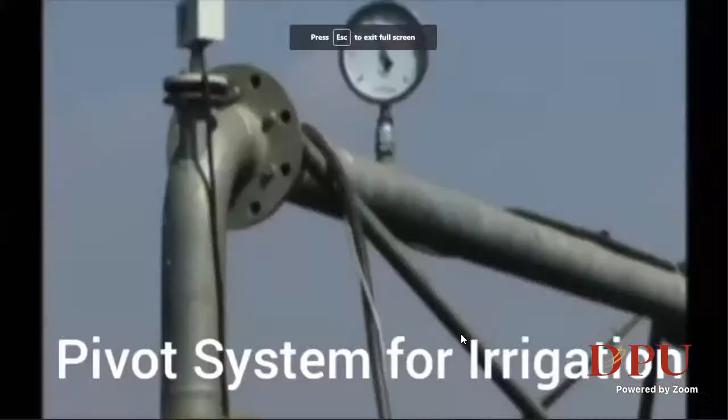Projects in the field of structural engineering, water resources, environmental engineering, concrete technology, transportation engineering.

Projects are industry sponsored, based on societal needs, and technical solution to real life problems.

Students enthusiastically exhibit their project in front of experts. Such platform boosts their confidence.

Strength of department is strong industry institute interaction, Center of Excellence by Dr. Fixit in the department.

Also, department has introduced new elective retrofitting and rehabilitation of concrete structures at SPPU.

Benefits of industry institute interaction to the students are sessions by industry expert, training programs, workshops, seminars.

Civil engineering cannot be learned in four walls of classroom. Hence, the department provides internship program to students and ensures that every student does it effectively.

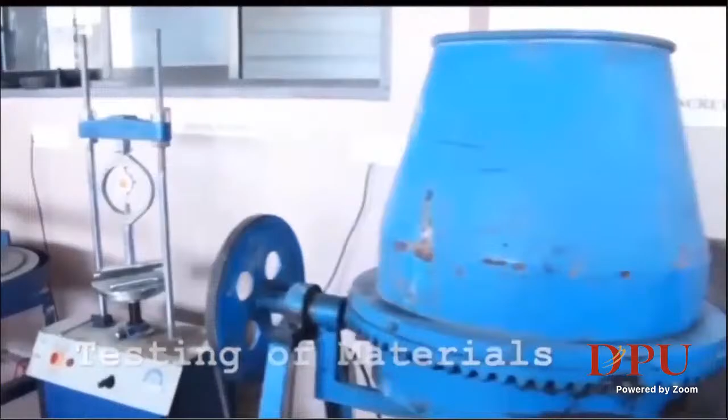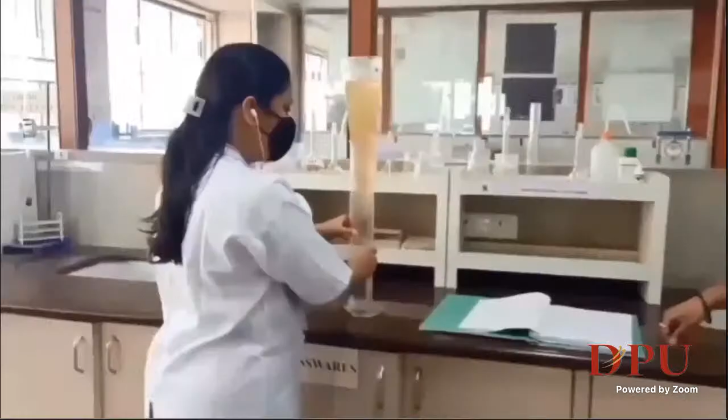The department has state-of-art infrastructure and well-equipped laboratories like testing of material laboratory with universal testing machine, surveying laboratory, fluid mechanics laboratory, transportation engineering laboratory, environmental engineering laboratory, engineering geology laboratory.

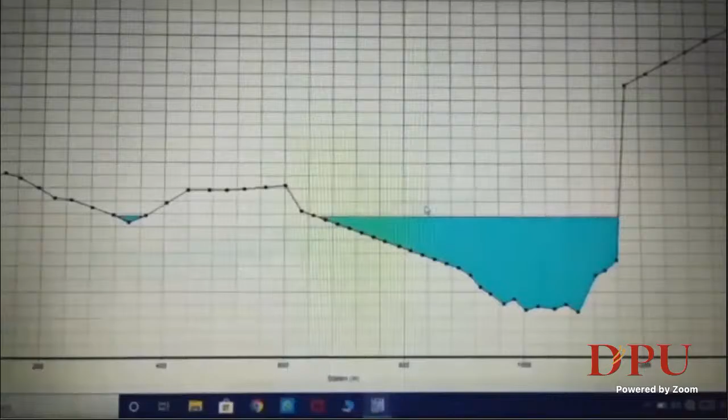Projects in the field of structural engineering, water resources, environmental engineering, concrete technology, transportation engineering.

Projects are industry sponsored, based on societal needs, and technical solution to real life problems.

Students enthusiastically exhibit their project in front of experts. Such platform boosts their confidence.

Strength of department is strong industry institute interaction, Center of Excellence by Dr. Fixit in the department.

Also, department has introduced new elective retrofitting and rehabilitation of concrete structures at SPPU. Benefits of industry institute interaction to the students are sessions by industry experts, training programs, workshops, seminars.

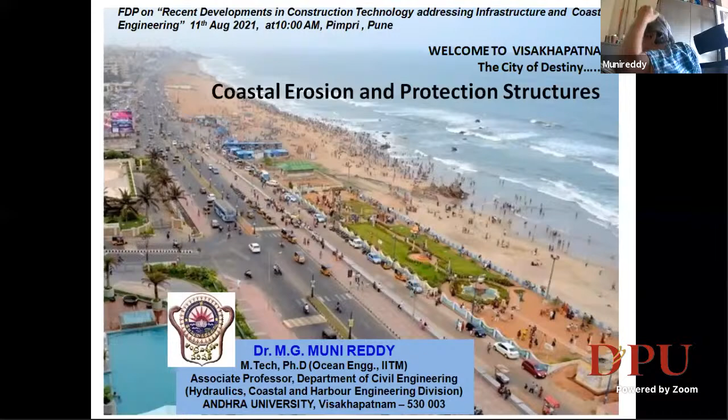So I think Pune may not be having the coastline, but I would like to welcome all of you to my city. It is called the City of Destiny, Visakhapatnam on the east coast of India in the state of Andhra Pradesh, where we have strategic naval establishments of the government of India that it is known for. And the second point is it is a natural harbor. It happened naturally, so that is another point for which the city has been remembered.

Okay. So this is the outline of my presentation. A little bit about the coast, some basic principles, coastal hazards, managing the coast. I'll also touch upon some of the field scenarios we have been dealing with, with various government agencies and funding agencies, and also our field studies from our department. And a little bit about coastal reservoirs, a new concept, unlike our conventional reservoirs. Recently in 2019, we had an international webinar on coastal reservoirs. That also I would like to stress upon.

So looking at our Indian coast, this is general information. It is the 18th largest coastline, and within 100 kilometers we have 40% of the population. This coastline is ecologically very sensitive. We have all types of ecological features: mangroves, tidal flats, coral reefs, turtle breeding grounds. Olive ridley turtles are famous on the east coast of India along this Andhra coast, and we have a salt lake. So along this coastline, we have many exclusive economic zones.

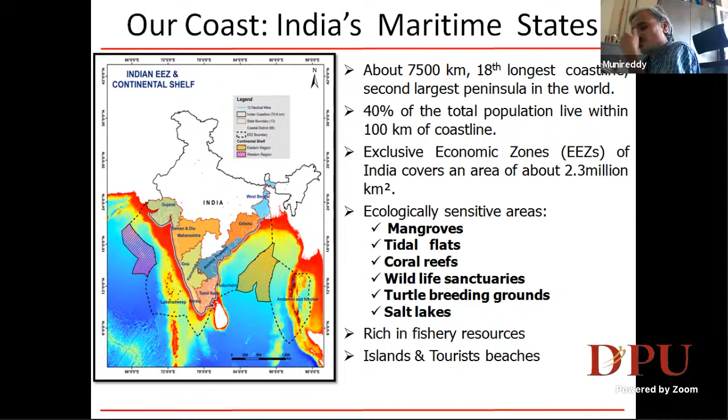So in Visakhapatnam itself, we have so many industries, especially apparel industries, pharmaceutical industries, and then HPCL, petrochemical industries, major ports. And compared to the West Coast, the East Coast is a little bit less in attracting tourists. We also have beaches, but our beaches are very rough and our coastline is very rough compared to the West Coast. The West Coast is very smooth. The beach slopes are very mild.

So we have very important establishments, ports and harbors. Then we have oil and gas, tourism, coastal industry, shipping, power plants, renewable energy systems, desalination. And India has 9 coastal states and 4 UTs. Right. So this is general information on our coastline.

So the moment you say coastal engineering, anyone with a civil engineering background who wants to deal with the coastline or the interaction of the sea with the landmass should have some basic background knowledge on the processes happening on the coastline, what we normally call coastal processes and landforms. From a physical oceanographical perspective, these are classified into erosional and depositional landforms of coastal areas. All these landforms are basically the result of the action of the waves.

The moment you say ocean or sea, the surface phenomenon is predominantly waves, and there are different types of waves. Normally, as a civil engineer looking at coastal infrastructure, I am always concerned with gravity waves. These are also called wind-generated waves. Wind waves are gravity waves. Okay. So there are some erosional and depositional forms. They look like this physically because the waves are continuously acting.

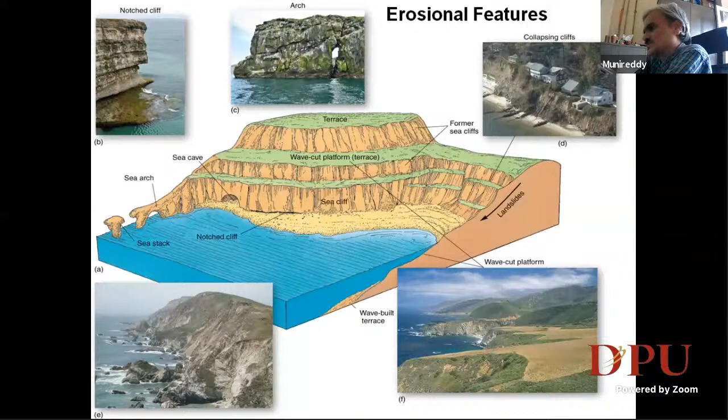So waves are generated by wind and propagate from the ocean to the shoreline across the continental shelf. For some people, waves on the coast are beautiful to enjoy. But for a coastal engineer, who deals with coastal infrastructure, they are violent too. They are not only beautiful for people to enjoy surfing, the scenic beauty, and peaceful time along the coast.

But for a coastal engineer, these waves are threatening parameters for a designer. They are violent. We have to deal with these types of wave phenomena or fluid phenomena. Basically, it is fluid-structure interaction problems you have to deal with when designing coastal infrastructure like breakwaters, jetties, any marine infrastructure, offshore pipelines, and berthing structures.

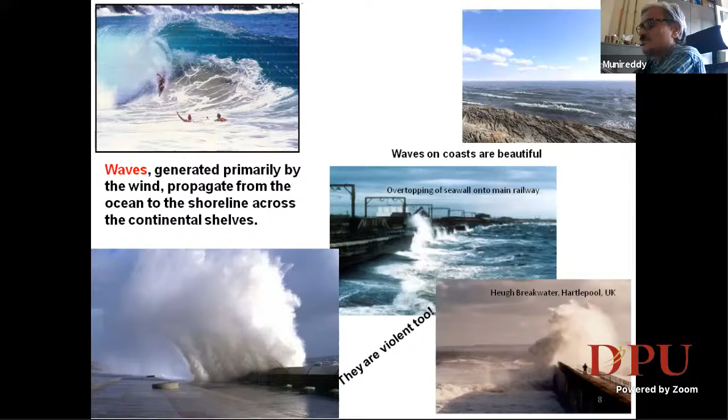Theoretically, these forces are called pulsating forces if the waves are non-breaking. If the wave is breaking violently on the structures, it will give very high impulse and impact forces on the structures. Very short-term, very high impulse and impact forces. You need to take care of that when you are designing the structures.

So, how to bring it down? This one. Okay, fine.

So the waves are generated somewhere. Yesterday you might have learned from JD Agarwal about waves; there are different types of waves in the ocean. But as an engineer, I'm only interested in gravity waves, which carry very high energy as they propagate. These waves generated in the deep ocean are called seas; when they travel to the coastline they become swells, and as they propagate towards the coastline they undergo many processes called wave transformations.

These wave transformations, which we call refraction, diffraction, shoaling, and breaking, are responsible for the turbulence and surf zone dynamics. That is why in the surf zone waves come with a lot of foam, bubbles, muddy, turbid water, because the water particles interact with the seabed, and that turbulence also creates sediment movement.

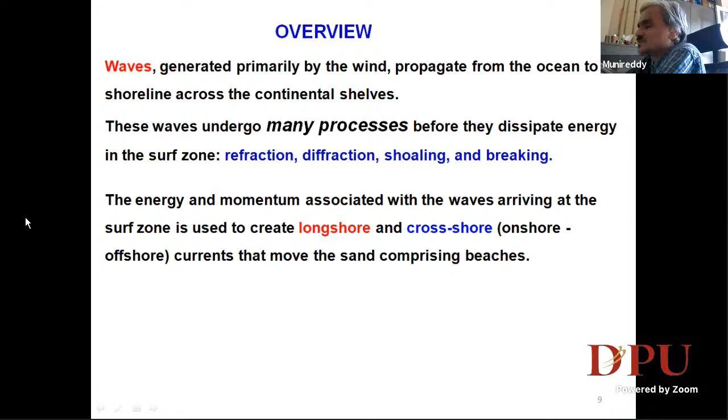Yesterday in Sundar sir's class, you might have learned about sediment transport, which is longshore and cross-shore. If sediment transport carries more sand away from the site than towards it, it results in beach erosion. That is the normal understanding of coastal erosion: beach or sand erosion. The beach is deprived of sand, and there is a deficit of sand on the beach.

So the question we used to ask our students is why a wave needs the beach, or why a beach needs a wave. Sundar sir is my teacher; when we were learning in our PhD program, he used to say that waves and beach are both husband and wife. They have to complement each other. Waves need some cushion to dissipate their energy, and that is the beach, or some energy-absorbing media.

So that is the beach. And that dissipating media, if it is a sandy coast, is sand. If it is a rocky coast, we have rocky outcrops and boulders, and grain sizes are much larger than normal fine sands.

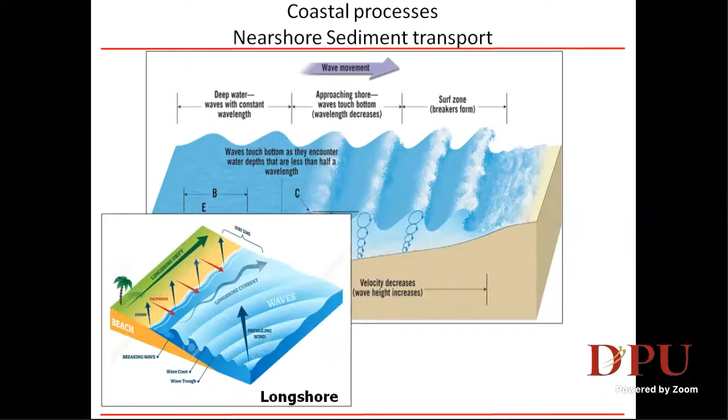This is what I was just telling you, the wave transformations, which you might have learned in previous classes. Then the nearshore sediment transport and the coastal processes. This is what we call longshore sediment transportation. I told you the waves, when they bring the sediments, approach with some oblique angle. Waves never interact with the beach exactly perpendicular to the shoreline, but always come at a certain angle to the beach. So when waves are moving at an angle, the momentum has two components, a horizontal component and a vertical component. The horizontal component is called longshore sediment transport or longshore drift, which in coastal engineering terminology we normally call mass transport.

Most of the time, the moment we say waves are moving, people understand that water is moving. No, the energy is moving. That is how you should understand the propagation or movement of the waves. And the velocity with which these waves move is called celerity. For a solid particle we call it speed or velocity, but for waves it is called celerity. C is equal to L by T.

But inside the waves we have water particles, which are very important in understanding mass transport. There are infinite numbers of water particles. At one particular cross section or water column, there is a horizontal velocity component and a vertical velocity component. The horizontal velocity component is parallel to the coastline, and that is what we call longshore drift, which is responsible for moving sediment from one place to another. This movement of sediment is always continuous, and it depends upon the direction of the wind, in other words, the direction of the waves.

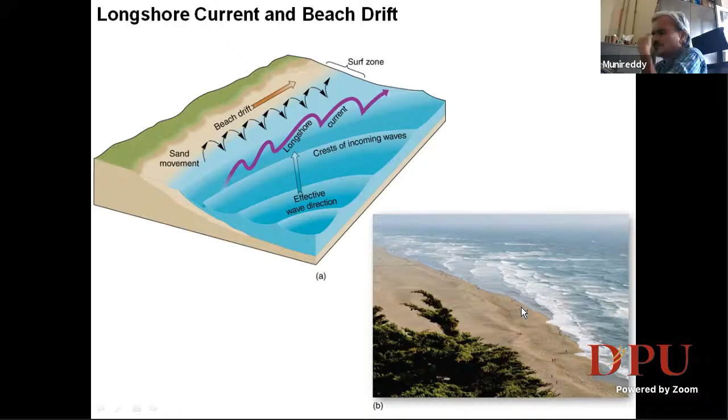As I told you, coastal erosion has different definitions for different people. You can define coastal erosion in many ways. So how do you define erosion? Erosion is wearing away of the land, or wearing away of the beach material, by the action of the waves. This is how a combination of words can be used for the different definitions of coastal erosion.

Coastal erosion happens because of two reasons. One is natural phenomena or natural events such as cyclones, storms, tsunamis, wave action and tidal action. The second category is anthropogenic, man-made activities which are continuously happening in the name of development along the coastline, which also trigger coastal erosion.

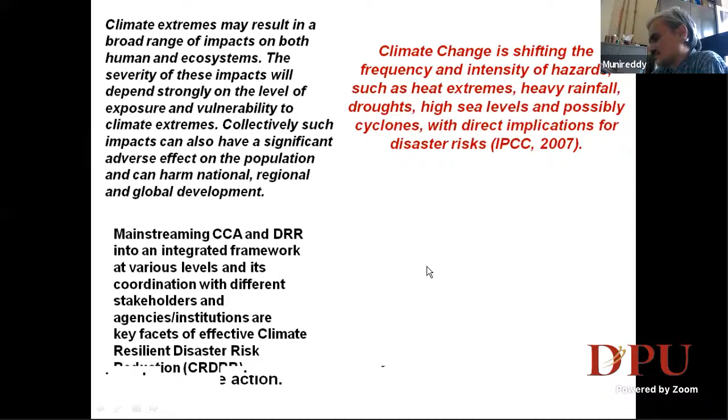During the course of the presentation, I tried to explain the impacts of sea level rise on coastal infrastructures. So at the end of the day, we have to design an effective climate-resilient disaster risk reduction management system for coastal erosion. That is what we look at as efficient, good coastal engineers when designing coastal infrastructures.

In India, India is highly vulnerable to natural and anthropogenic disasters on account of its geoclimatic settings. It has a very long coastline, and the most commonly occurring natural event is cyclonic hazards. People from Pune may not feel the aftermath of cyclones, but on the coastline, my house is very close to the beach. Every time a cyclone is coming, we feel scared. The impact of the cyclone is enormous.

I parked my car in my compound and forgot to put the handbrake. During the cyclone, my car was moving back and forth according to the direction of the wind. Then immediately I tied the car with an iron chain to my gate. So that is a huge impact of wind velocities and corresponding beach processes on the coastline. So I'm just concerned about cyclonic hazards.

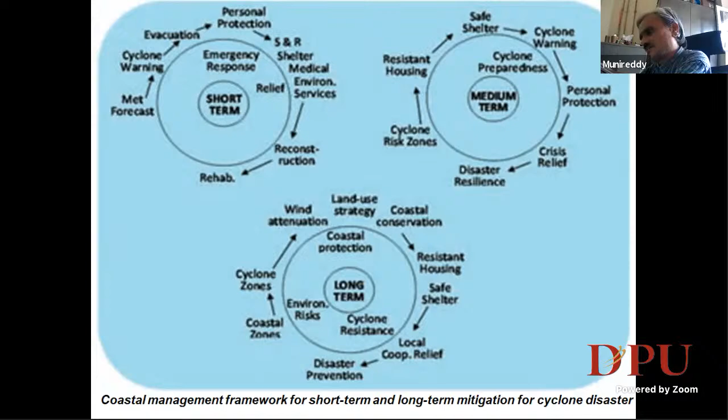There are many management techniques, called short-term, medium-term, and long-term. Short-term protection anybody can do with common knowledge. As I told you, the GVMC authorities simply bring hundreds of trucks of big stones, about 1 ton or less, and dump them on the coastline to protect it temporarily for a week or 10 days, so that the government will take a policy decision and call tenders for permanent or long-term solutions.

Once you settle on long-term solutions and have decided to protect a particular coastline, the coastal manager or coastal management system has to look at the various alternatives. So what are the various alternatives? What are the coastal protection structures being used over time across the world? We are also following similar trends, procedures, and concepts in Andhra, in India, along the coastline.

So coastal engineering is the study of the processes ongoing at the shoreline and construction within the coastal zone. The field involves aspects of nearshore oceanography, marine geology, and civil engineering. All these specialists, technocrats, engineers, and scientists have to come together to combat only one enemy, that is coastal erosion, eroding the coast.

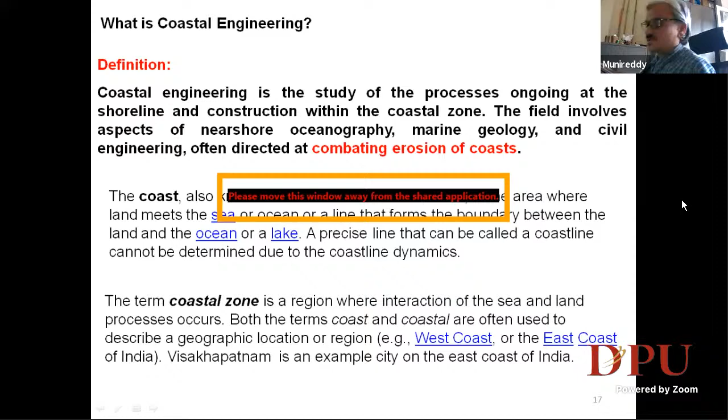Let me see, let us look at it. What should I do? You're blocking, remove this screen, that block from the shared screen. Oh, now it's gone, okay fine. Now still it is showing. Please move this window away from the... it is not moving. No, still it is there. You can stop sharing and move it again, start from that slide sharing the screen. Okay, now it is okay sir. Right, but still it is coming again.

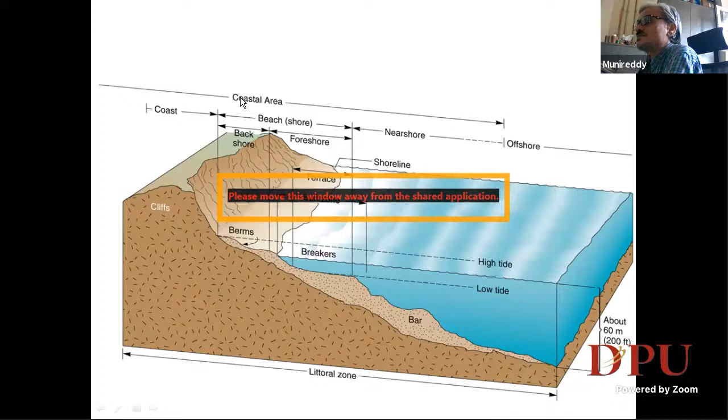So once the wave breaks, it dissipates a lot of energy. So this is the point, from this onwards, where the wave first breaks when traveling from the deep ocean towards the coastline. Wherever the wave is first breaking, after this the wave will undergo multiple breakings, but the first breaking from this point towards the deep sea is called offshore.

And from this point towards the landmass, it is called the coastal zone. This coastal zone, as per our CRZ guidelines, the Government of India Coastal Zone Management Regulation Zone, changes dynamically. Maybe you fix about 500 meters or 1000 meters from this point as the high tide line or coastal zone, based upon the existing beach and breakers at that particular point in time. After 5 or 6 years, when the beach is eroding and the water is coming close to the landmass, again this coastal zone...

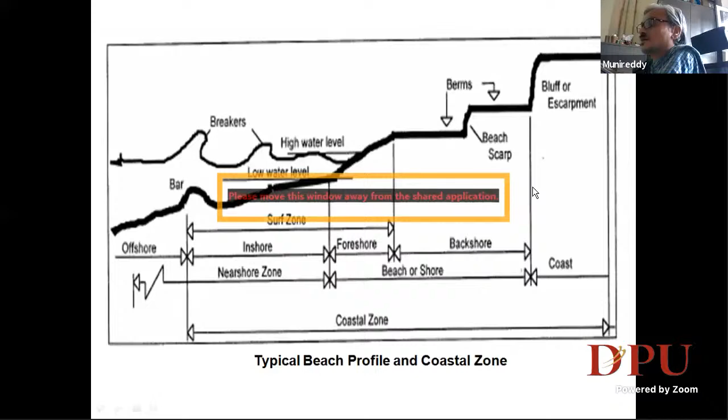So having learned something about coastal erosion, now our aim is to protect how to protect our coast.

There are many causes and time scales - cyclones, tsunamis, extreme waves, sea level rise. Another very important cause of coastal erosion is that we are not giving sufficient sand. Sand is supposed to come from the rivers and finally be deposited in the sea, but we are damming the rivers, so we are stopping the sediments that are supposed to join the ocean. So the beach is now deprived of sediments that are supposed to come from the rivers. That is another big reason for the deficiency in beach materials.

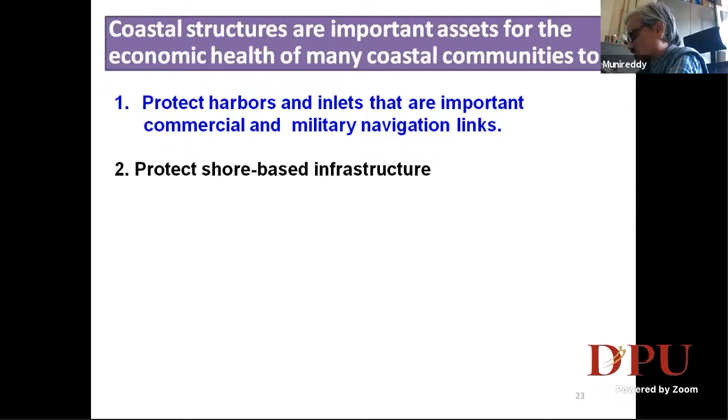So now the question is why we need to protect coastal structures - they are important assets for us. We need to protect harbors and inlets for commercial and military navigation links, especially in Visakhapatnam, because the Eastern Naval Command is here, so it is very critical and strategic for military movement and navigation. We must provide beach and shoreline stability control. As a coastal engineer, I always look at whether my beach is stable or reaching dynamic equilibrium, though reaching dynamic equilibrium is difficult in terms of time scales. But at least I try to ensure that in every season my beach is stable - stable meaning it is neither accreting nor eroding.

So navigation, coastal communities, roads and bridges also need flood protection.

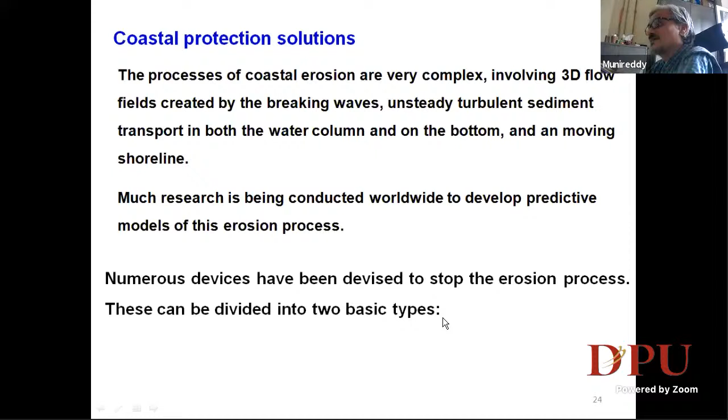There are numerous solutions for coastal protection, but basically they are classified into two types. Numerous devices have been devised to stop the erosion process. These can be divided into two basic types: hard solutions and soft solutions.

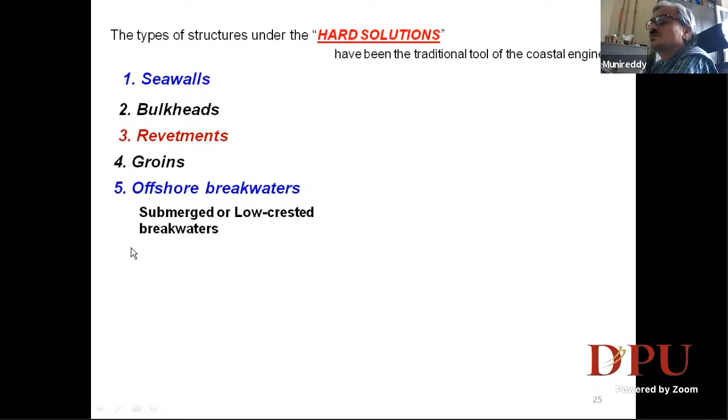What are the hard solutions? Hard solutions have been the traditional tool for the coastal engineer, such as sea walls and breakwaters. These are solid structures, and you have to interfere with the natural phenomena using these structures.

The types of soft solutions include sand dune management and vegetation, which is called bioshield. Soft solutions are more natural and eco-friendly. We also have beach replacement or beach nourishment, and sand bypassing.

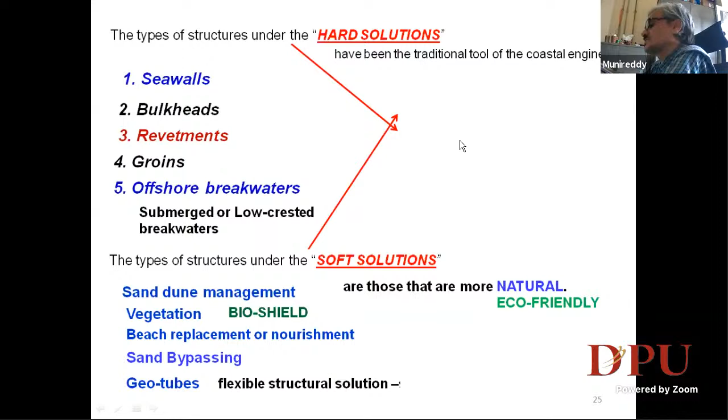In addition, the recent approach is to have both. Every solution has its own advantages and disadvantages. But take the advantage from soft solution and the advantage from hard solution, combine them, and you have mixed hybrid or combined solutions, such as beach nourishment plus groynes or reef breakwaters or offshore breakwaters.

Then sand dunes plus vegetation - this is a more natural, more eco-friendly solution: sand dunes with vegetation, the bioshield. UNEP and FAO are advocating the use of bioshield as much as possible to protect against natural disasters and storm surges.

And concepts are like this, so we have mixed solutions. As an engineer, I have to assess the performance of each engineering intervention, how well it is performing.

And there is no alternative. You have to, at any cost, protect it. Then you have to go for a solution like sea walls that will give very strong protection for that infrastructure. Again, the seawall has its own disadvantages, but we will discuss that also.

So there is a breakwater just to protect against coastal erosion - the function and purpose is different. Functional and structural performance has to be evaluated or studied carefully before finalizing the solutions. That is very important.

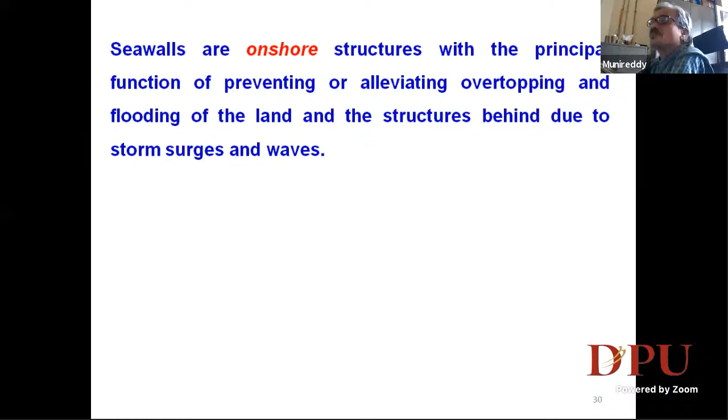So sea walls are onshore structures with the principal function of preventing or alleviating overtopping and flooding of the land and the structure behind due to storm surges and waves, built parallel to the shoreline as a reinforcement part of the coastal profile.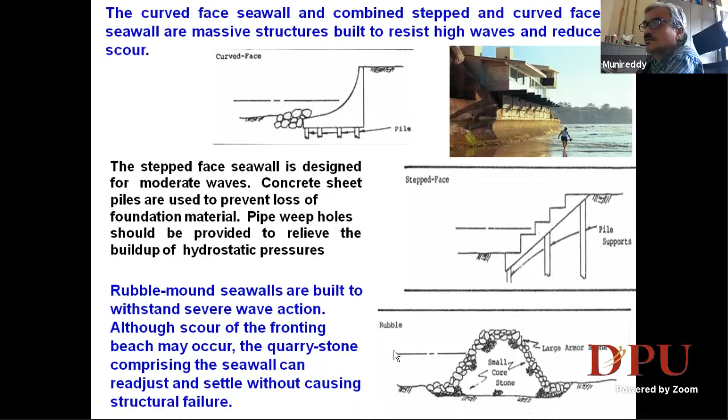Then rubble mound, simple, just a mound of stones. Rubble mound sea walls are built to withstand severe wave action. Scour of the fronting beach may occur. The quarry stone comprising the seawall can readjust to settlements without causing much damage. The advantage of the rubble mound is that if there are differential settlements in the seabed, because these are not monolithic structures, they are individual stones, elements, they adjust themselves. But these structures will not adjust because they are monolithic concrete structures. There is always a problem of scouring below them.

So rubble mound sea walls, curved face sea walls with mounds, and step type sea walls. The second category is bulkheads, similar to sea walls, but bulkheads are built as soil retaining structures, in most cases a vertical wall anchored with a tie rod. Bulkheads are similar to sea walls, but smaller in size. They are just to protect soil slopes, retaining structures for mild wave conditions.

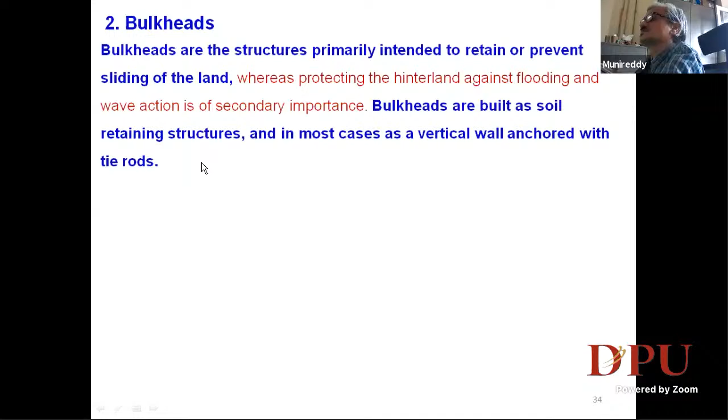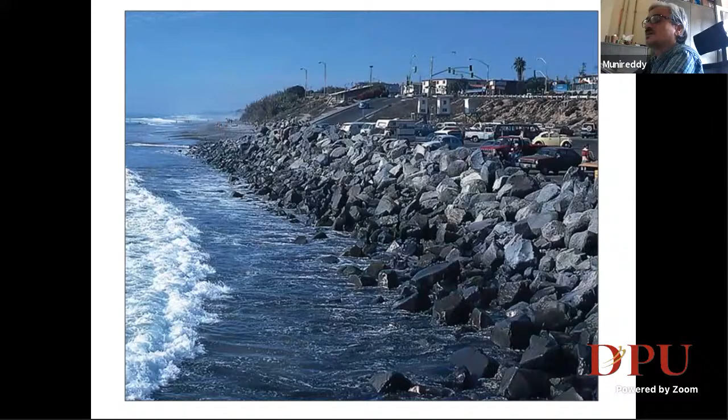Then revetments are onshore structures with the principal function of protecting the shoreline from erosion. They consist of a cladding of stone, concrete or asphalt armor sloping along the natural profile, just to protect the coast from erosion. The advantage is that it has large porous voids. Whenever the wave approaches, it is trapped inside the porous structure and the voids, so it will absorb as much of the wave energy as possible, or the wave will dissipate as much of its energy as possible on these structures. There are different alternatives for revetments.

Then groins. Groins are structures used primarily when there are longshore currents. Groins function only when longshore transport occurs. Otherwise, groins will not function properly. Their functional efficiency will not be good when there is no longshore sediment transport.

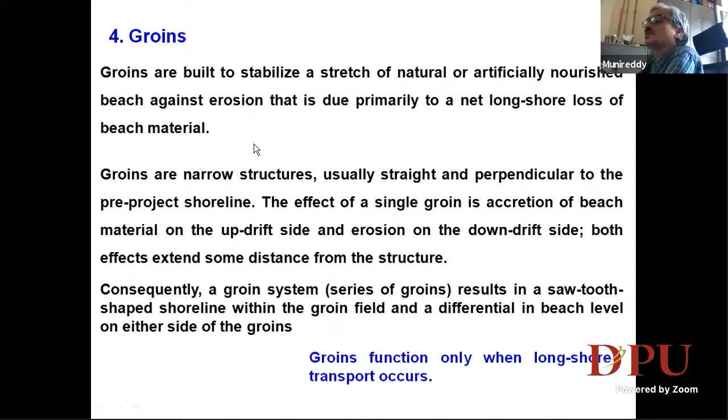They are built to stabilize stretches of natural or artificially nourished beach against erosion that is primarily due to net longshore loss of beach material. So most of the time, groins alone will not work to their hydraulic efficiency or intended function, but they have to work in combination with beach nourishment. These are the groins. You might have learned about this the last couple of days; Sundar sir might have told you much of this.

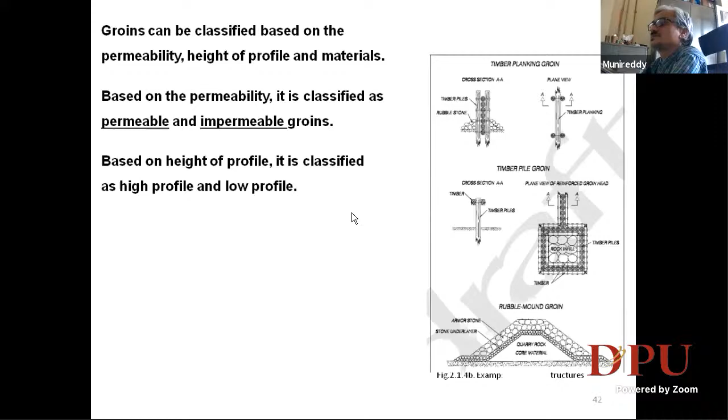So they have classified them based on the permeability, height of the profile and material. So permeable and impermeable groins; based on height of the profile, high profile and low profile systems. In most cases, groins are sheet pile or rubble mound construction. Most of the time in India, the groynes are constructed as rubble mound structures.

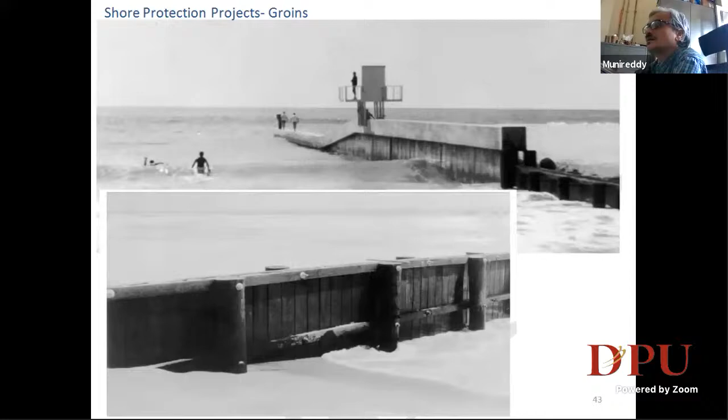So always, as you see in the field, if one groyne is constructed, it cannot work. It has to be a field of groynes. So maybe around 5, 6, 7, depending upon the length of the coastline you want to protect. Between these two groynes we call it a cell, the sediment cell concept, to calculate the sediment budget along the coastline.

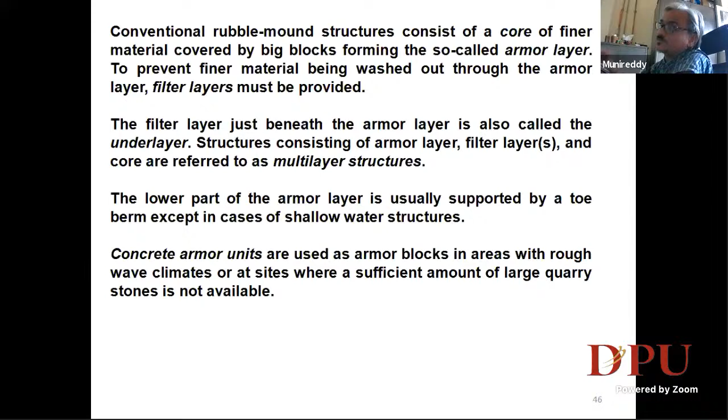So it has multi-layers. You have an artificial armor layer, then you have an under layer, then you have a core. So it is a multi-layer structure. The breakwater is constructed with multi-layers: a primary layer, then secondary layer, then core.

One more important thing here: conventional breakwaters are constructed such that one end is connected to the shore, and the other end of the breakwater will be in the water. It may be in the surf zone, in shallow waters or in deep waters. So invariably, one end of the breakwater has to be connected to the shoreline in conventional breakwaters.

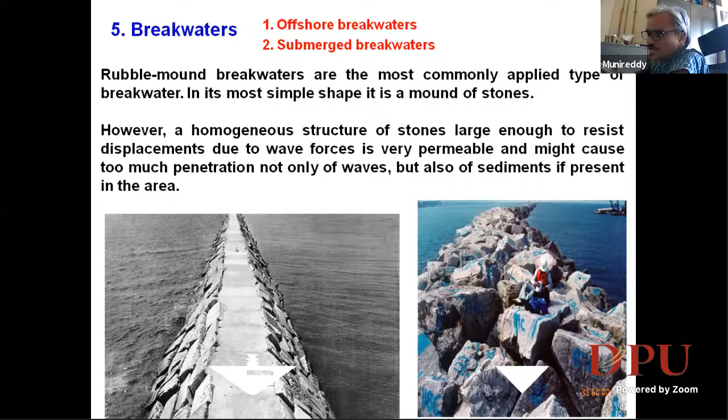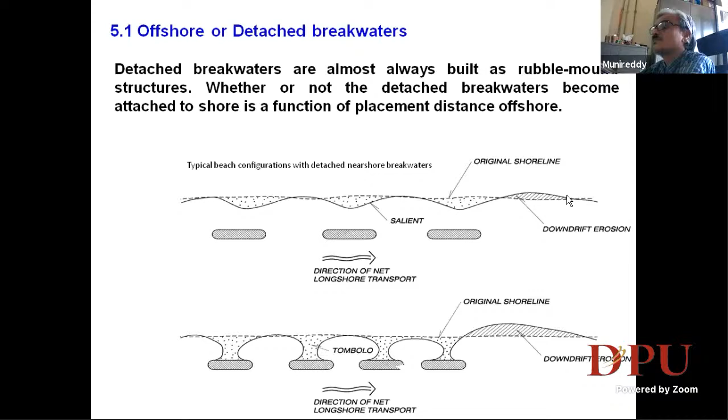And there is another breakwater called the detached or offshore breakwater, where both ends are not connected. Both ends are in the offshore. A conventional breakwater is constructed perpendicular, so one end will be here and another end will be in the water. But offshore breakwaters are constructed parallel to the shoreline as segmented constructions. So it looks like this.

Offshore breakwaters are usually shore-parallel structures located in water depths of 1.5 to 8 meters. For deep water conditions, they will not work efficiently. It is suitable for open ocean exposure. Offshore breakwaters are not only used for shore protection, but also to provide harbor protection. You are allowing the water to mix with this coastline and then come back.

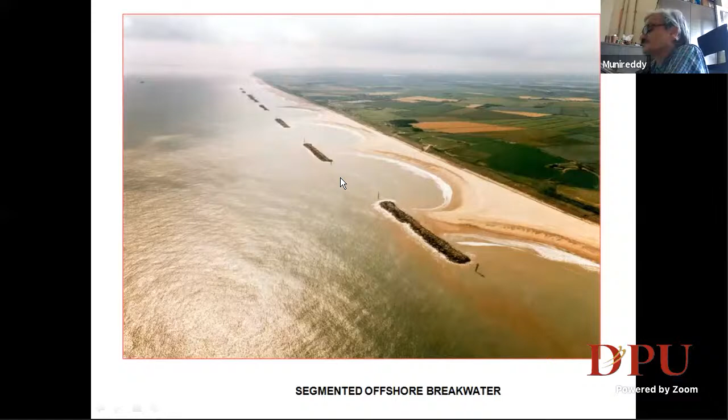So you see that exactly opposite to this, the beach is progressing towards the breakwater. When this beach progression attaches to it, that is called a tombolo. This one still has to reach; this one has already reached. So this portion of the coastline is protected using these offshore breakwaters. And it acts like a natural swimming pool. So groynes always will not be enough.

And this is another very important one, not commonly used in India, but a very effective breakwater system, called the semicircular breakwater. It has very good advantages compared to conventional breakwaters. It is well suited for shallow water situations with intensive wave breaking; due to the dissipation of energy, both the wave forces on the caisson and the wave reflections are reduced. This is a simple fluid mechanics concept.

This is a porous structure. When the wave interacts with it, because of the porosity and the openings, the wave will be trapped inside. Inside, this breakwater is hollow. It is not a solid structure like vertical sea walls or rubble mound breakwaters. So this is a hollow section.

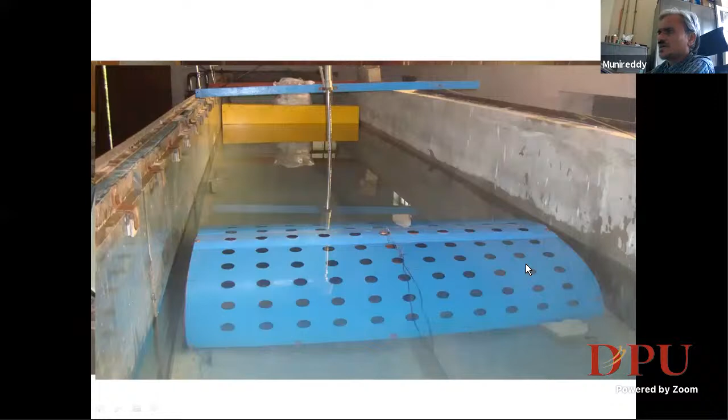Then the second category is the soft solutions. A soft solution is a non-structural method for coastal shore protection. An example is vegetation planting, which is an effective and inexpensive way to stabilize the dunes. One example is in Visakhapatnam. Many of you may know the Visakhapatnam steel plant, a very big steel plant in South India. They get water from the sea, and their property is very close to the shoreline, at a place called Appikonda.

Their property and compound wall are protected with casuarina trees. They planted thousands of casuarina trees along the shoreline in front of their property. So vegetation is an inexpensive and natural way to stabilize the sand dunes, because a sand dune already exists there. In addition to that, they also planted casuarina trees. So this is a mixed type, a combination of sand dunes and vegetation.

Another alternative solution is beach nourishment. Beach nourishment is also a very effective soft solution compared to the hard solutions. With hard solutions, people will hesitate to go onto the beach because you are constructing with rubble mound. For example, groynes are constructed perpendicular to the shoreline, and there will be a lot of rock mass. So people may slip, and there can be accidents for children or old people when they approach the coastline.

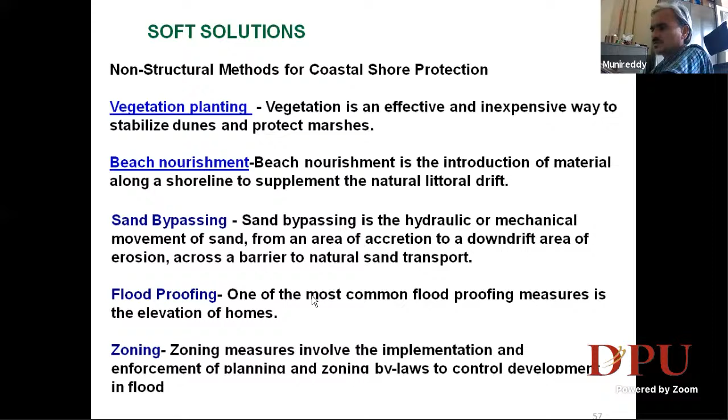Then flood proofing. One of the most common flood proofing measures is the elevation of homes. I'll show you some examples. Then zoning and retreat. In some cases, it may be less expensive to relocate the endangered structure than to invest in large-scale protection. You have to retreat and allow the beach to interact on its own naturally. The no action or do nothing approach is commonly used by engineers to help evaluate different courses of action.

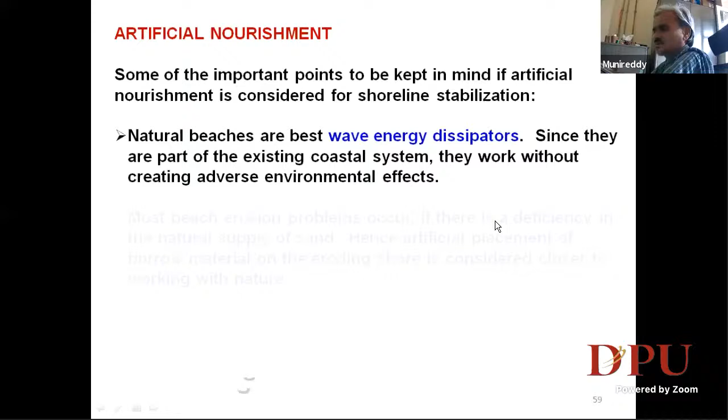So artificial nourishment is bringing sand or sediment material from offshore, from what are called spoil grounds, as wave energy dissipators. Erosion problems occur if there is a deficiency in supply of sand. Artificial placement of borrow material on the eroding shore is closer to working with nature. The only problem is periodic replenishment.

Every year the cost of dredging, pumping and placing the sediment on the beach will escalate, so the costs and rates will be higher. So maintenance is a problem in the case of artificial beach nourishment. Otherwise, it is a beautiful solution. CWPRS gave this beautiful solution to the Visakhapatnam port and the Ramakrishna beach, where you just saw the submarine. That was the best solution to my knowledge till now.

The only problem is, it was working beautifully with periodic sand nourishment. But once the costs of replenishment and maintaining the nourishment increased enormously, they discontinued it.

So on the second point, the disadvantage is it is very important to select the suitable borrow material. So you have to assess what is the existing stable beach size of the material. You have to bring the same similar size from the borrow material, either it may be offshore or it may be another place where it is deposited. So most of the time we will not get the same size.

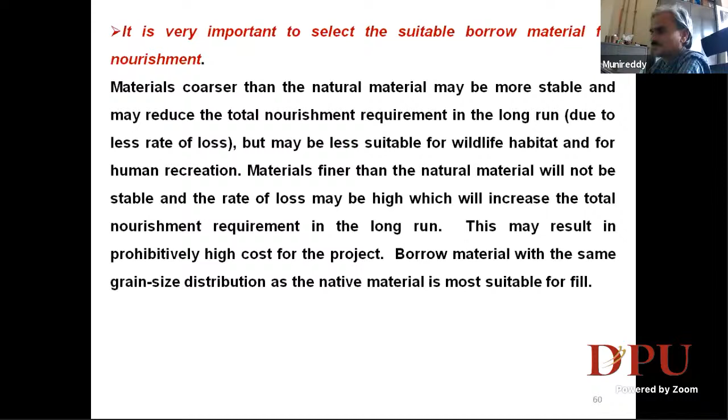So next, another natural soft solution is you go for the vegetation. Another important one people are now using is submerged reefs or submerged dikes or submerged breakwaters. You put on the seabed, below the SWL or MSL, mean sea level, a submerged dike or submerged breakwater instead of emerged breakwaters. Emerged breakwaters means above the mean sea level. Submerged means below the sea level. They are also called low crested breakwaters. My entire PhD was on these low crested breakwaters.

So the advantage of this is it operates on the condition that when h by d is equal to 0.78, the wave has to break. So these reefs will reduce the water depth. That triggers the wave breaking exactly over this structure. Once the wave is broken, smaller waves will propagate, so less energy. With less energy, it cannot erode the coast. That is the idea.

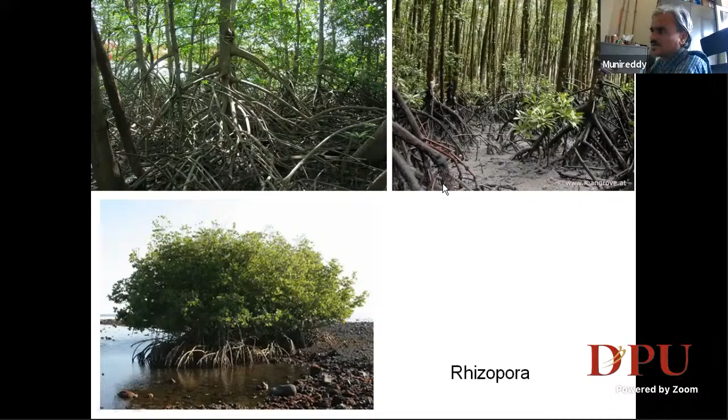Another one is you go for vegetation. It may be seagrass or casuarina trees or mangroves. It is also natural protection like this. We have done this research in our laboratory. We have a wave flume of 45 meters length, 1.25 meters width, 1.25 meters depth. These are the natural mangrove vegetation. We have done experiments with flexible vegetation and rigid vegetation.

So videos are playing. Can you see this? This is flexible vegetation, seagrass, and we have rigid vegetation. With the rigid vegetation, we simulated the stems of the mangroves. At the bottom, you can see we have done experiments on a semicircular breakwater system. The third one is not visible. First two, yeah, the one where you have the cursor right now. It is a semicircular breakwater.

It's not visible, it's just a dark slide we are seeing. These two you can see, right? Flexible and rigid vegetation. Now it's the other way around; the third one is visible, sir. Video, no. I'm not able to see. What about others? It is not visible. Video is not playing, no sir. I think I have to share, right? Is the video playing now? No, sir. So the dark slide is there. Okay, fine. Let us not waste time with that one.

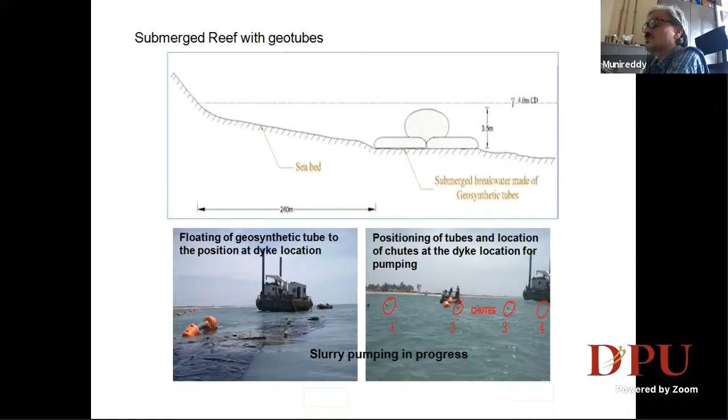Okay. So the same concept was given for our Visakhapatnam also by NIOT. This is after constructing the submerged breakwater, or submerged dike; people also call this a submerged dike. So the waves are breaking, and broken waves with smaller amplitude will reach here, so they will not erode the coast.

So the next one is beach nourishment, nourishing the beach. There are two methods, the rainbow technique and shore face nourishment. Rainbow technique means you pump using the dredger from a distance onto the shoreline. The second method is shore face beach nourishment: you deposit or pump the sand exactly onto the beach from the dredger through the pipeline. You can see this photo.

Photo is visible to you? Yes, sir, visible.

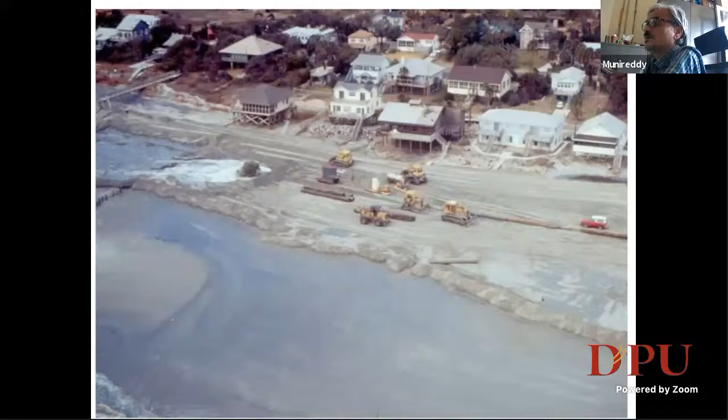Yeah. So through this pipeline, I am exactly putting the sand, nourishing the beach where it is eroded. This is the outlet of the pipeline, which puts the sand exactly on the beach.

Over a period of time, people have realized that the rainbow technique is not very effective, because when it is throwing the sand, some will fall into the water and some may be on the beach. It will not reach the place where it has to be pumped because of the draft limitation of the ship. The ship cannot come close to the shoreline because it requires a minimum depth to operate. That is why this is not very effective. As we saw in our case, Visakhapatnam, they discontinued the rainbowing technique.

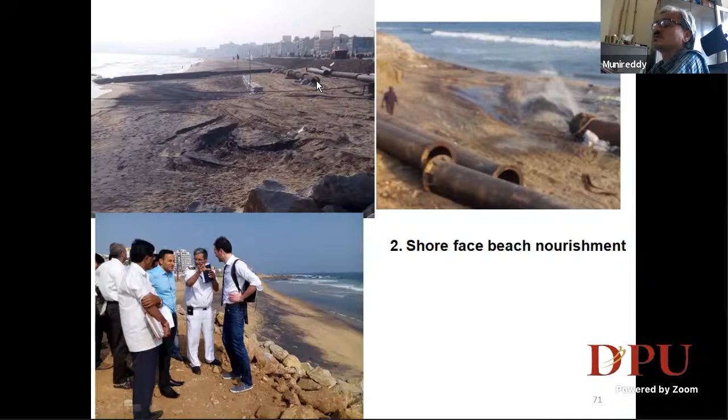They adopted this. He is the collector and he is from the World Bank. I was also the coordinator for this project, coordinating with the World Bank experts, so we were there on the beach during that time. They are directly putting the sand wherever there is erosion, onto the point. That is why this is more effective than the rainbowing technique.

And this is another example of sand bypassing. These two are acting as jetties or groynes, so there is a lot of deposition here and erosion here. What they did is take the sand from here and pump it onto this side, sand bypassing to replenish the down current side of the jetties. So they are depositing here. This is another very good solution.

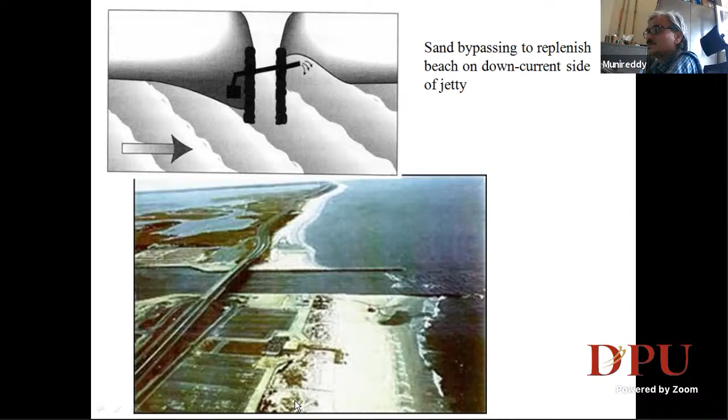This has been there in Pondicherry. We were there when I was doing my PhD at IIT Madras; Sundaragowda sir and my guide, we went there for a site visit. At that time Dutch people had built, below this channel, the approach channel through which fishermen boats go inside the harbor, a siphonic tunnel-like pipe. They used to pump the sand from this side to the other side.

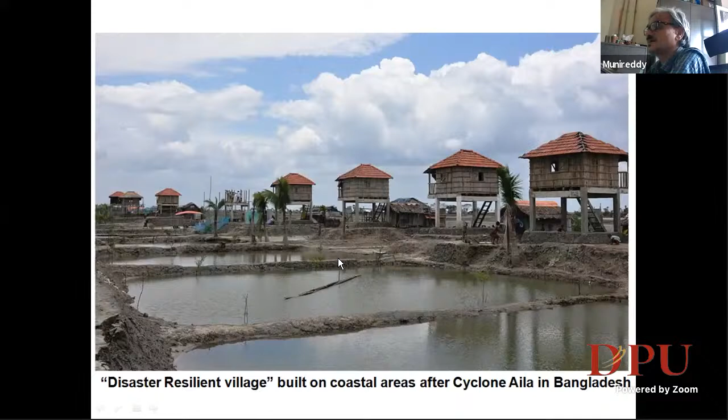This is another very good, though unconventional, solution. There is Ennore Expressway in Tamil Nadu with two ports, Chennai port and Ennur port. Ennur port is constructed only to import coal from Australia for the North Chennai Thermal Power Plant.

There were hundreds of these pipes lying idle in Chennai, perhaps brought by one government for an underground drainage system, but the next government didn't use them. So what they did is bring them here, fill them with concrete, and place them along the shoreline.

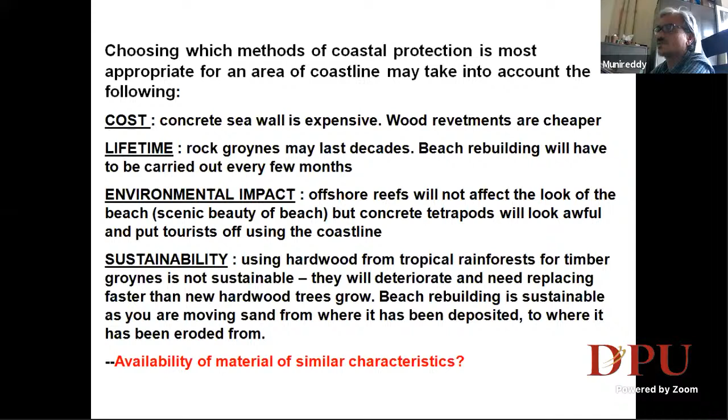The solution given was a perched beach—submerged reefs or submerged breakwaters, which some countries call perched breakwaters. It is at a distance of about 220 meters from the road at RK Beach, where we have the Kursura submarine museum.

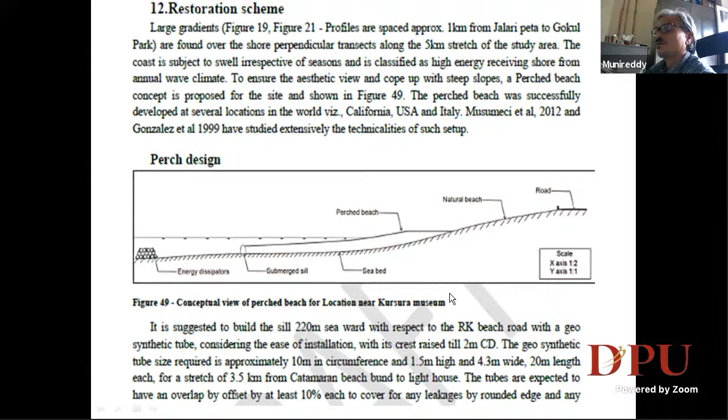So after that, what they did is they decommissioned it and capped the wells. So they now abandoned this. So now problem is, that is one problem. So they have lost the precious oil wells.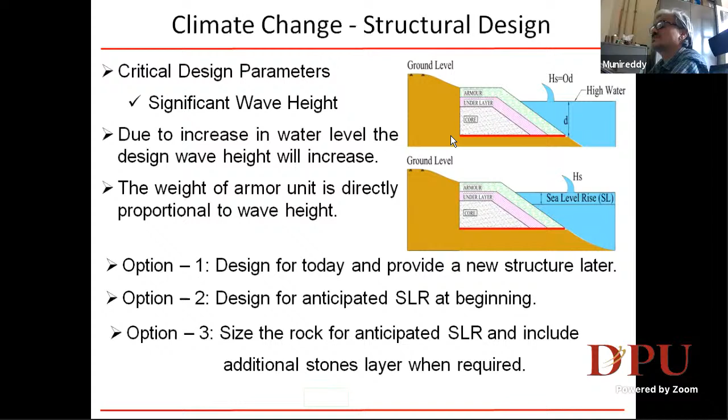Then size the rocks for anticipated SLR and include the additional stones whenever required. So first and third option is: design today for today, provide a new structure later, or design today, provide additional stones on the structure for the protection of the existing infrastructure.

This is one, that is structural design. Then functional design is the same thing: you have a design for today and build a new structure later, or design for the anticipated SLR at the starting, which is not possible because still we are not clear at what rate the sea level is rising. So SLR is different from different countries, different locations, different states, different coastlines. So that is a problem.

So these are the altogether different protection structures: submerged, emerged, groynes, beach fills, revetments, seawalls, artificial reefs. Okay, so I think with this, I conclude my first part. If the coordinators allow me a few more minutes, then I'll go to the sea level. It's okay, shall I stop here?

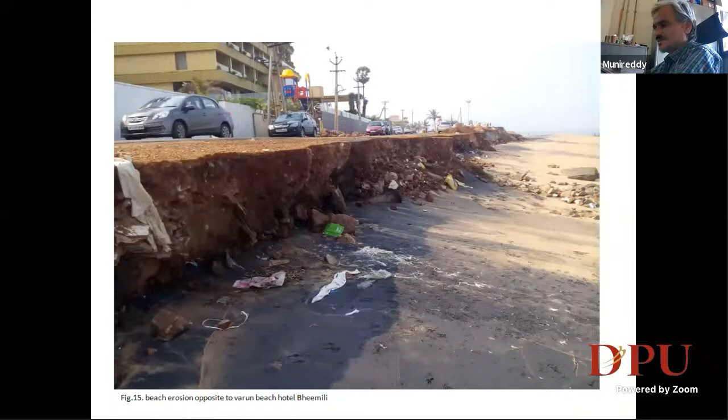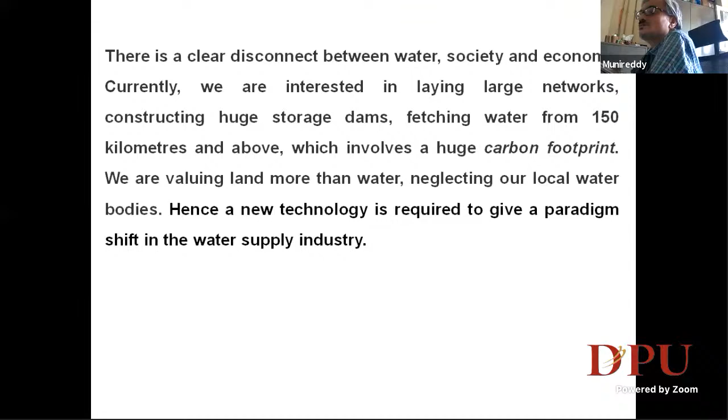In conventional reservoirs, if you go for large dams, there are a lot of problems with local people, a lot of submergence and inundation problems. You have to vacate villages, thousands of people, land acquisition, displacement of villages. Those problems will not be there in coastal reservoirs because of the very sparse habitations along the coastline close to the shore, the sea.

So there is minimum diversion flow in the river, which has less impact. Environmental damage is very minimum. There is zero risk due to failure of the coastal reservoir. If a land-based reservoir is damaged, downstream people, downstream properties, and downstream areas will be at risk — villages, agriculture fields, or any other infrastructure. So there are a lot of problems with downstream people. But with coastal reservoirs, the next downstream is only the sea, so there's no problem, no risk due to failure.

Cost of construction is relatively low. Land reclamation is not required. It promotes tourism and freshwater aquaculture. So the coastal reservoir has minimum environmental impact on ocean ecology. This is the crux of the entire coastal reservoir concept.

So how many of you know about a hydrograph? We have a base flow. At the peak of the hydrograph, which is a very small portion of it, a huge discharge from the rivers in a short span will join into the reservoir. But when the reservoir is full, it reaches the HFL, the high flood level, or maximum water level in the reservoir, and you have to send it downstream using the spillways.

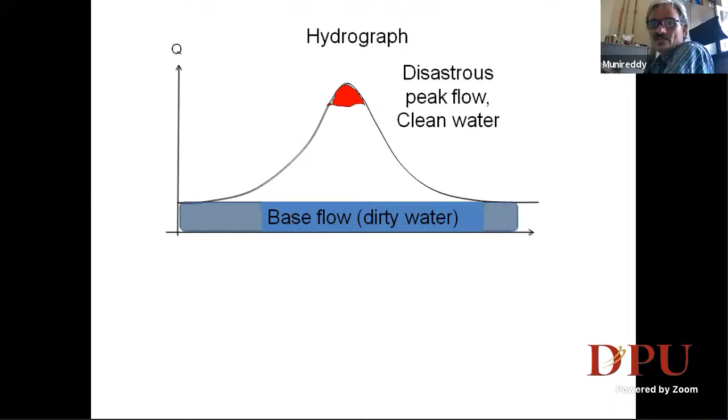So it is like this. On the sea, you have a river joining the sea, and I just want to construct an obstruction here. So it will store this. This storage is only the excess water, not the entire water. Only the excess water which is supposed to be discharged through the spillway during the floods. That water would otherwise go to waste and join into the sea.

But we want to store this and protect it, so that is the concept of the first generation of coastal reservoir. The second generation of coastal reservoir: many rivers are polluted because many industries are established along the river bank, so they pollute the water. So in normal days, we don't store the water, because in normal days all the polluted water will come and join the sea. During the floods, only the rainwater or runoff, which is not polluted, is discharged through the spillway from the reservoir.

That we will tap using some gate provisions here. Otherwise, the rest of the time it will go and join into the sea as usual. In the first case, the problem is if you construct a barrier here, it will collect all the water during floods and also during the normal season. In the normal season there may be polluted water, and that polluted water will pollute the stored water. Later people realized this disadvantage, so after that they came up with second generation coastal reservoirs.

So it is a unique structure. A coastal reservoir is a unique structure constructed at an estuary or bay in the sea, at the point where the river meets the sea, to store a portion of excess water at flood times only. These coastal reservoirs and coastal wetlands ensure the quality of water and play a critical role for the rural coastal population. Especially when a river is flowing through a city or in very close proximity to a city, if you construct a coastal reservoir, the stored water can be directly used for the nearby city.

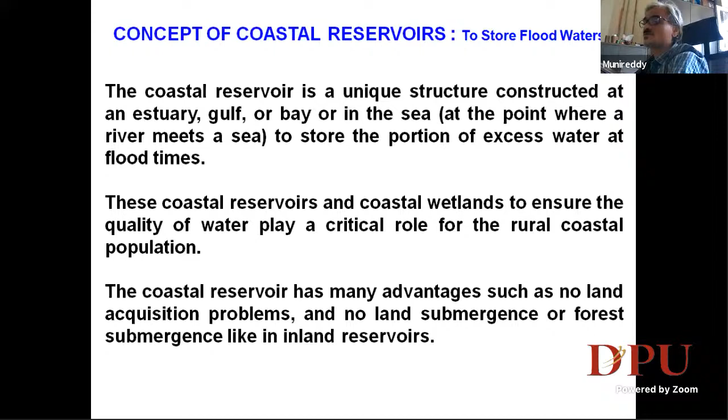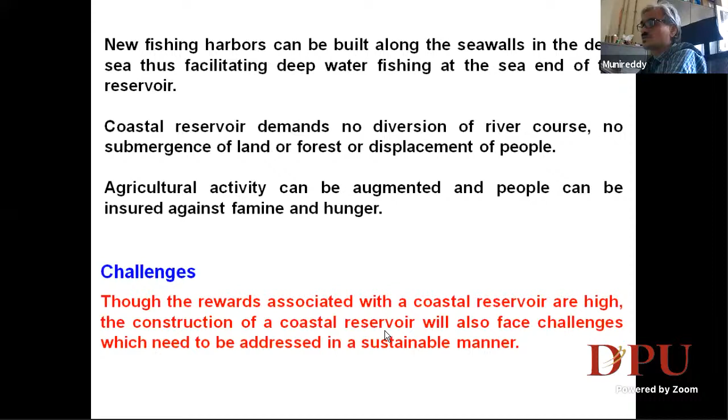Many cities now have a water scarcity problem that can be supplemented by using these coastal reservoirs. The concept of coastal reservoir enables major hydrological and meteorological extremes to be fruitfully utilized for the benefit of mankind, storing river flood water for the future. So they can supply. So let us go to the challenges. For every structure there is a challenge. Though the rewards associated with the coastal reservoir are high, its construction will also face challenges which need to be addressed in a sustainable manner.

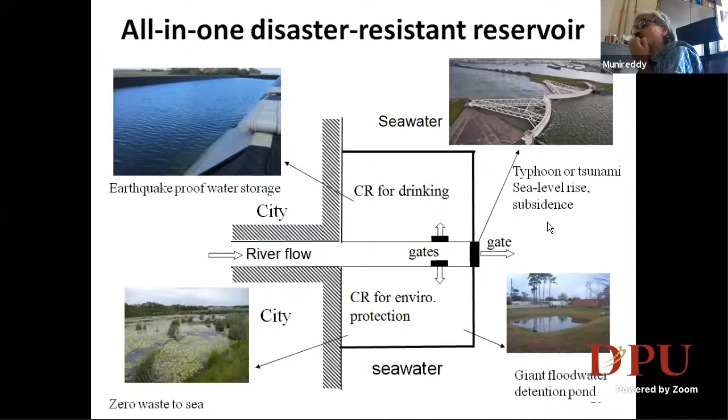This is just a schematic view. You divide this coastal reservoir in the sea. One side you can use as clear water, another side for sea level rise. Then you can also use it for flood protection, flood detention pools, wetlands, and the city. So over a period of time, second generation and third generation coastal reservoirs are evolving, and new concepts are evolving on their construction. This is one of the solutions in Singapore. This is another in South Korea.

So we have a coastal reservoir in India, but till 2019 I also didn't know. When I invited an expert from Australia who has patented this coastal reservoir, we came to know that we have a coastal reservoir in India, called Thanneermukkom. They constructed it in 1974. The Kalpasar project is newly coming, and a coastal reservoir in Mangalore is also coming up.

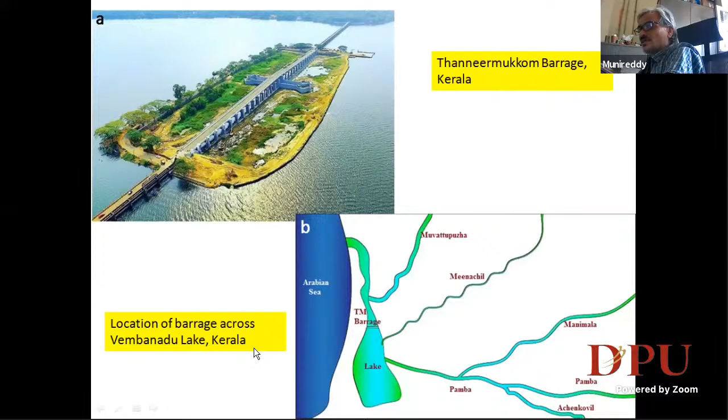Very briefly, the Thanneermukkom barrage in Kerala. This is the Arabian Sea and the Thanneermukkom barrage. Here many rivers and rivulets are joining. If you dam here before they join the sea, you can store the water. This is the location of the barrage across Vembanadu Lake in Kerala. They have already done this.

So you can also have this GBM, Ganges Brahmaputra Meghna River. So this is how it looks like. You can see this. These are all the rivers. They are finally joining into the sea. You construct a barrier here. The other side is sea. So no land submergence, nothing, no problem. If there is a failure of this dam, downstream there is no problem of risk for any people.

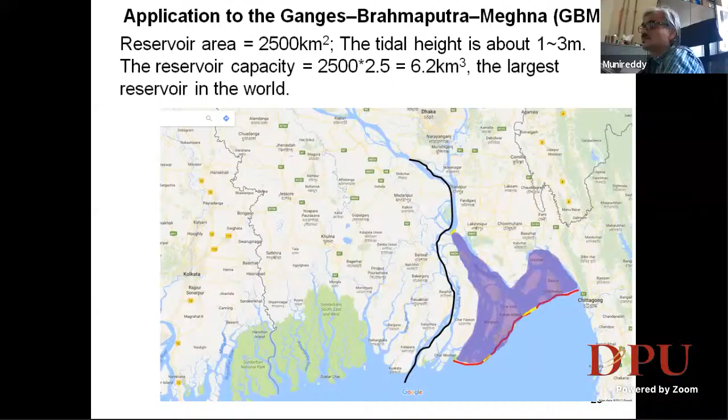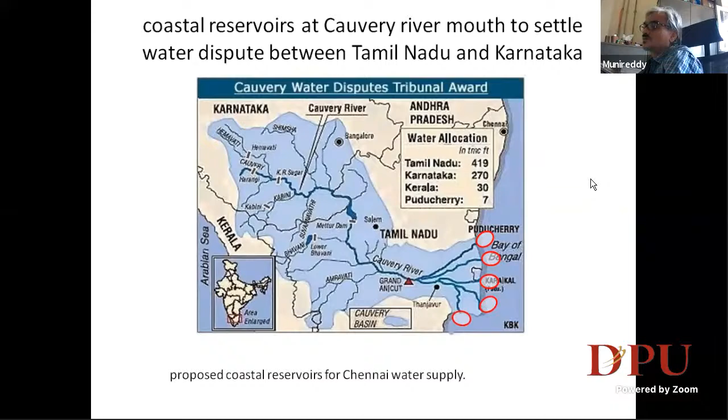So Palar River, same concepts. Then we have a Cauvery River. So many rivers are joining at the Bay of Bengal, and there are possibilities and potential that you can tap this water. You can use this water, potential water systems. So these are different types of concepts. These concepts are site specific, changes from location to location. You can use here.

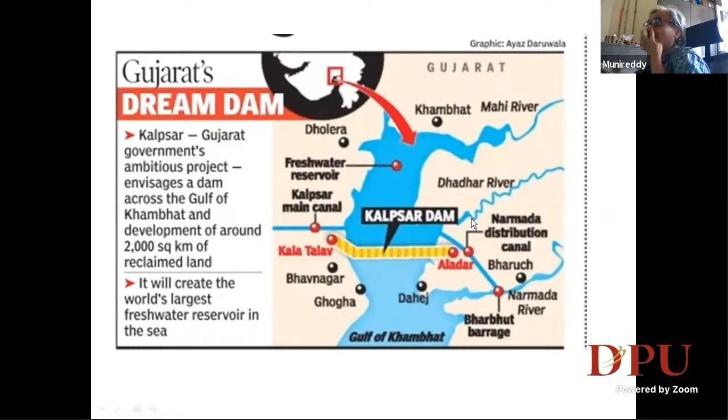So there is another big project coming up in Kalpsar. So they construct a dam like this. Okay. So this is a small introduction to the coastal reservoir concept. Many do not know about this coastal reservoir. So recently I conducted a seminar, Sustainable Storage Strategy for Water Resources Development. The gentleman Shu-Qing Yang is from University of Wollongong, Australia, who has a patent on coastal reservoirs. So I invited him for the seminar, Coastal Reservoir, a Sustainable Solution to Water Scarcity. So we did that.

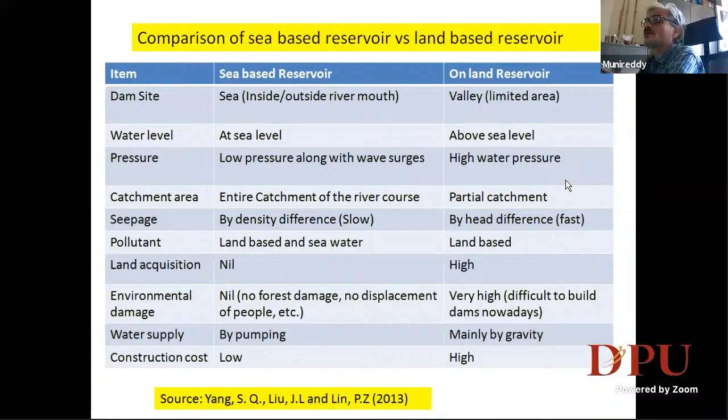Last thing, everybody should remember this. It is not that India is running out of water. It is that water is running out of India. This is the motto. This is the idea behind the concept of coastal reservoirs in India. So we have abundant water in India, but we are not properly tapping it during the short spell of the high floods. Okay, thank you very much.